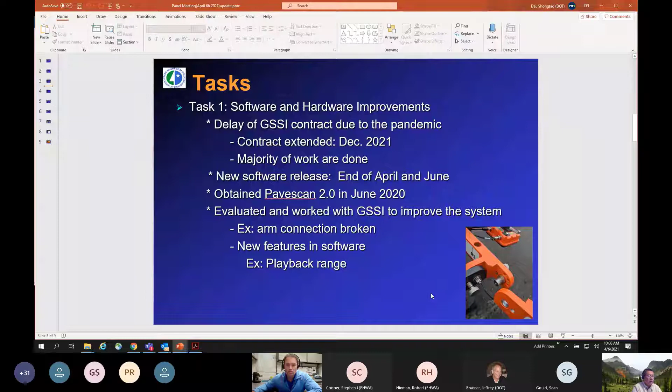You can compare this density on the side. And also you can select the part of pavements, and then you can select from this station to that station to view the data collected. It's a very handy feature for the field people.

And task 2, that's the development of actual specifications. Like I mentioned before, we drafted the puck calibration and the field data collection procedure last spring, and also produced the training videos, and that was based on a 1.0 device. And since we got 2.0, we updated the video portion and the laboratory calibration portion a few weeks ago. And the video is uploaded to the DPS website, and this is the address. So you can go there to view this calibration video, the puck calibration video.

We also plan to update the field data collection video and update these procedures using the 2.0 device by the end of May. By that time, we should be able to get on the field and collect the data. From a data collection perspective, we continue to hire the contractor to collect data for us.

For this year, we are going to try a new program called pay for the data versus pay for the hour. Previously, we just paid the contractor by the time spent collecting data for us. But starting this year, we're going to tell the contractor to get equipment by yourself, and we'll pay for the amount of data. We'll give you a spec and the data format spec, and you need to follow this spec to collect the data for us. Then we'll pay for the amount of data you give us, instead of paying for the hours you spend collecting data.

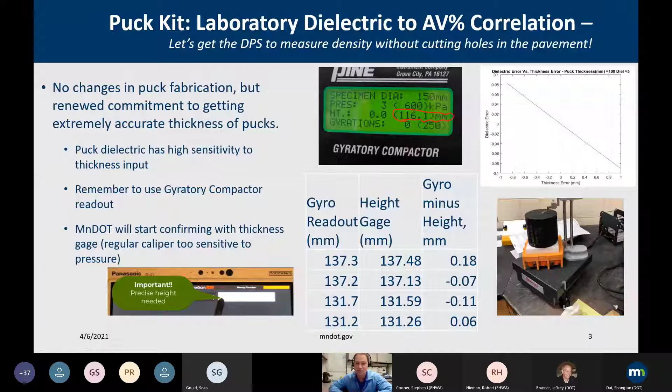And then in the lower right corner, you can see a puck thickness measuring device, and we're going to do some in-house testing with that just to make sure that this gyratory readout is a good way to go. And then also it's good to have a way of checking to make sure that the gyratory compactors are calibrated, which I believe in most states they're required to be. So more to come on that.

And the goal here is to match your QA/QC tracking information that you do for all your material on a project. And the nice part about these inputs is you just fill it in once, and unless it changes, you just leave it there, and then it's tied to your information. And you can choose to track it within the PaveScan software or leave it blank and track it elsewhere. But I think you'll find just keeping everything self-contained in the puck kit software is going to be the way to go.

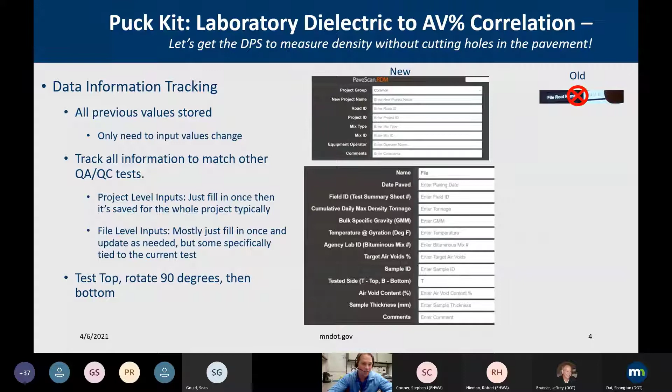And one thing I'll mention, if you don't get everything I'm saying during this presentation, we do have a video I'll be referencing later that takes us through the whole process of getting these tests done with the puck testing kit. Another thing I'll mention right now is we're advocating doing a top, rotate 90 degrees, and bottom test with the puck, just to make sure that there's no effects of where you are on the puck in case there's some sort of a compaction gradient within the sample itself. But again, that's in the video, so keep your eye out for that.

And then also one thing we found with this new puck testing kit, for those of you who did the first 1.0 version, you kind of had to be a ninja a little bit with the samples and make sure you got everything flipped and switched and changed within a certain 5-second time window. And that, of course, leaves a lot of room for error. And with this new puck testing kit, it's very simple. You know exactly which step you're on. You start with the background pictured on the lower left, work to the metal plate, then you do the surface measurement, and then the surface plus metal.

And the contractor who used this was very complimentary of how the software worked and how intuitive it was. So that was good news to hear back from the contractor. Another thing that's really nice, circled or squared here in green, is that you actually get a dielectric readout right away. So with the HDPE, you'll know whether you're within the 2.32 to 2.38 range right away and whether or not your sensor is in spec.

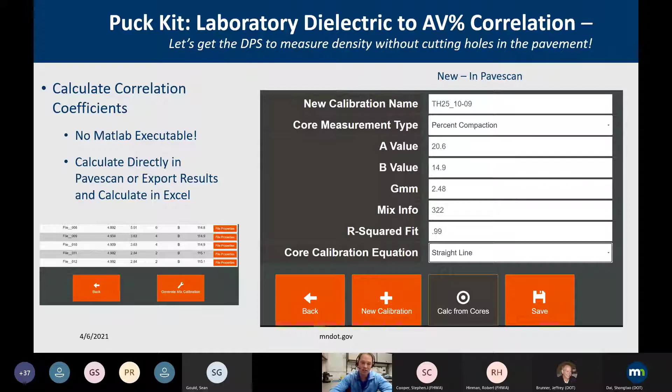And again, no more executables on the processing. You have the results already to go. And in this case, once you go into your specific test, you just take the calibration results for a linear correlation between dielectric and air voids, and you should be ready to go with your field testing kit to be measuring, directly outputting your voids percentage or percent compaction, whatever you prefer.

And this can either be done directly in the software to get the correlation coefficients, or we will provide a little template we've built in Excel, where basically if it's green, that means you can paste data. So in this lower corner is your puck results. And then later you'll see when you paste the field results, it tells you how good your fit is matching to the actual field cores that we're currently advocating that you take to ensure the accuracy of your conversion.

And again, it's just a simple copy and paste from the exported file that of course contains all the information you input for that specific project, which we think is a good way to make sure we're tracking everything right.

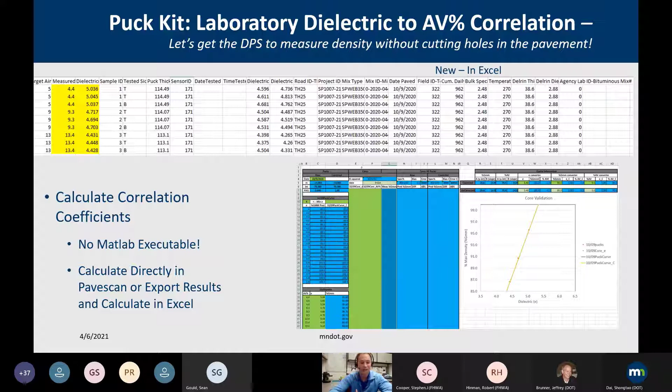But in this case, you guys don't all get a car, I'm sorry, but you do get a puck testing kit if you're part of the pooled fund. And the only thing the vendor asked is that you share all the data that you collect. So from our information, we believe all these different states, Maine, North Dakota, Ohio, Alaska, Idaho, New York, and of course, Minnesota, have our puck kits.

But if you are part of the pooled fund and you have a system, please inquire with us or directly with GSSI, because they did let us know that they're willing to share the puck testing kits with the pooled fund to try to get this technology moving and do this coreless calibration with the technology.

And lastly, I wanted to summarize some thoughts and then also play a little bit of the training video, and this is where you can go for the more detailed information. And please give us feedback, because we have Camtasia software that allows us to do different editing with our training video, but you can jump to different spots. If you're more interested in the test itself, you can do that.

And just in general with this puck testing kit, we think it's a lot more user-friendly. One way to say it is there's less opportunity to screw it up. And then, of course, you get real-time feedback, which is important.

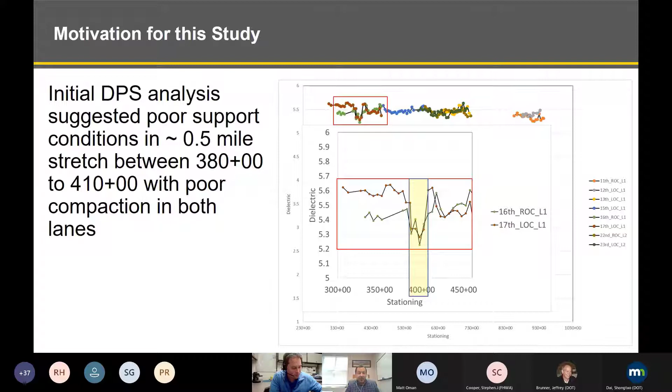Otherwise, with the conventional quality control, quality assurance process, that wouldn't be the case. So that's something to keep in mind - having even just one profile of density could have been enough for this project. I wanted to emphasize that advantage doesn't require full coverage. It just has to show us that the density changes with distance, and that's something we want to take advantage of using this type of technology.

This was also corroborated later on by checking all the different density results. As I said before, the standard QA practice did not capture this low density spot, and that's something we can take advantage of at this point. We can take action immediately and come up with solutions right away, instead of waiting a couple of days, if you're lucky to find that there was a defective area.

With regards to what we're planning to do with this project, the objective is to further advance and improve DPS technology, taking advantage of AASHTO specifications developments. NCAT has extensive experience with equipment and operator certifications, specifically the profile certification that we currently have at our test track facility.

The idea is also to use DPS technology for data collection and analysis of different methods. We also want to conduct round-robin testing and develop precision and bias statements for those results. We plan to support communication by participating in meetings and workshops programmed in the near future, and help with training and technical assistance to states and others, continuing to promote this type of technology and marketing.

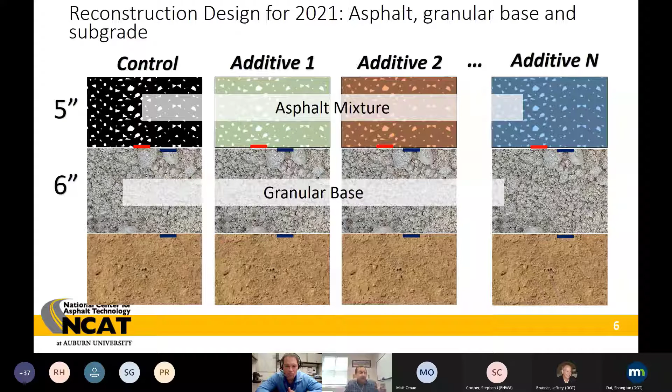By the way, these are going to be placed in one lift, so we're going to have 5 inches all the way down to 1 inch at the track. This way we'll be able to separate thin and thick layers at the track as well.

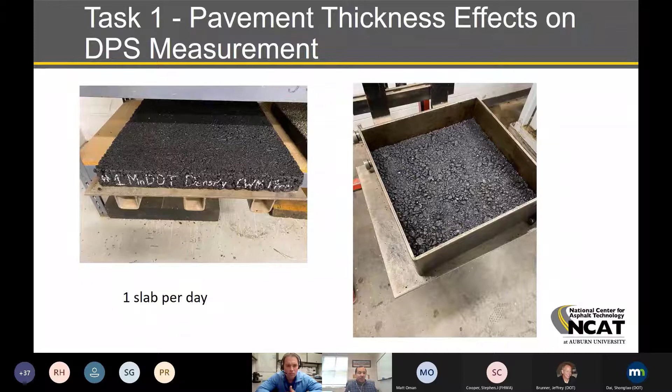We already started the process of building these slabs. We can do 1 slab per day, and the process at the beginning is going to take a few slabs. We're going to test extreme values in regards to thickness and density.

As you can see here, the lab testing plan was to have 2 different mixes - one is a 9.5 millimeter nominal maximum size, and the other is a 19 millimeter nominal maximum size. The plan at the beginning was to have 4 different density levels ranging from 88 to 97% of Gmm, but at this point we're going to try to start with extreme values from 88% to 97%. We're going to have those 2 mixes with slabs ranging from 1 inch to 3 inches for the 9.5 millimeter, and a minimum of 2 inches to 4 inches for the 19 millimeter.

That's basically trying to comply with the thickness to nominal maximum size ratio - we don't want to go too low, which makes it difficult to compact, or too high, which may cause different effects. So that's pretty much task 1.

Task 2 has to deal with equipment and operator certification, and here we're going to try to reproduce what we have in place with regards to profiling systems. The idea is to come up with a parallel practice to AASHTO R 56-14.

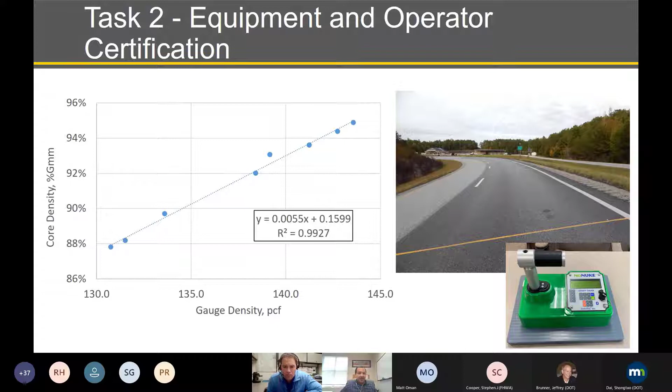The cores were taken at the beginning of construction, and then there's another set to have 8 total. The second set was taken 1 year after, and this is the correlation between the core density and the gauge density. The idea is to use this correlation to have the entire density profile using this device, and that's going to serve as a baseline to conduct the cross-correlation analysis.

With regards to task 3, we're going to work on development of precision and bias statements for the pucks that are created in the lab. As Kyle mentioned, we're hopefully going to use that new kit to evaluate or come up with the relationship between specific gravity and dielectric using the advantage of that new kit.

The plan is to have one set of cores or pucks. We're going to create those here at NCAT, and then ship those out to different labs, so every lab is going to have the same set of pucks to test on. We're going to use ASTM E691, which is the standard practice for conducting this type of study and determining precision and bias statements. From here, we're going to develop repeatability and reproducibility results or criteria.

At this point we are looking for a minimum of 6 labs. Ideally we'll have 9 to have the entire matrix to come up with these values. One thing we discussed with Kyle and Dr. Dai is to maybe use one antenna as one lab, and that's something we can do, but we'll still need to find a couple more labs at least to have more data.

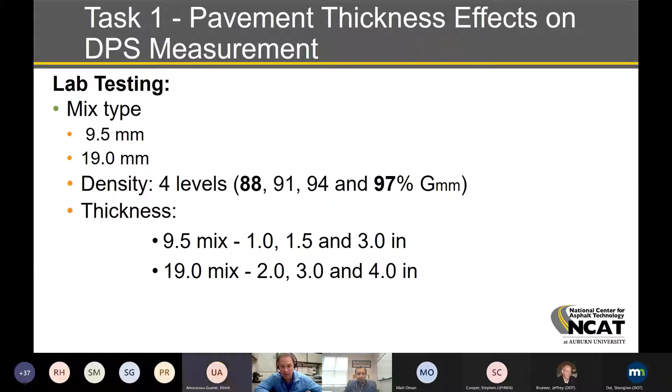All right, so continuing with task 3. Again, the plan is to use those same two mix types, a 9.5 and 19 millimeter, and also use the same density levels ranging from 88 to 97%. One question I wanted to ask the participants is whether we may want to use CoreLok from the beginning.

As Kyle was mentioning before, we plan to measure the dielectric before dunking those samples in water. But if we were to use CoreLok, we may be able to avoid adding water to the pucks. So that's something we're probably going to do, use CoreLok for the samples we distribute among all the different labs. Of course, we want to know the specific gravity of those pucks, but at the same time, we don't want to add water to them. So I think at this point, CoreLok is the way to go.

And later on, we're gonna move on to field testing, and we're gonna come back again with several sections where we're gonna take cores, and we're gonna compare what is the effect of moving from lab compacted samples to cores, and we already have an idea based on several conversations and meetings with MnDOT that there's an effect. We would like to see what is going to be the effect on those statements when we move from lab compacted samples to cores.

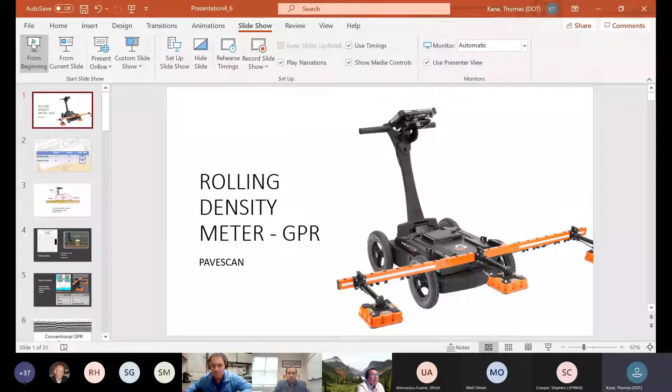So 2020 was the first year that we piloted the rolling density meter. We did it a little differently than I think some of the other states on the call. We don't actually own a meter yet. It's coming. The GPR is in the mail, if you will. We actually put the language in the contract for some paving work we had in 2020, 5 projects specifically, and we had one of our really proactive, forward-thinking testing firms, Advanced Testing, actually purchase a unit and do the testing.

It was really good for us because I don't necessarily know if we had the manpower and the availability last year to do all of this ourselves. So we had a really good partner with Advanced. So a lot of this data that I'm going to go through came from them, but obviously we were working with them quite a bit through the season. We had 5 jobs scheduled last season. Only 3 went. You know, we ran out of calendar a little bit.

But this presentation that I'm going to go through with everybody right now is what I shared with both some of our regional construction people who have asked for it and our regional materials engineers. So some of these slides are going to be very much not news to anybody on this meeting, but I left them in because I think it was important to understand how we're promoting it or explaining it within our regions of the state.

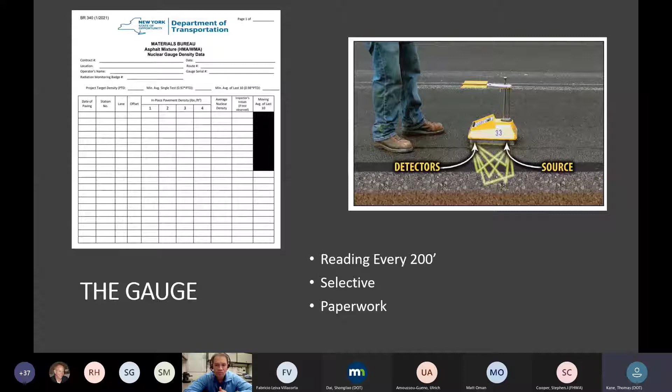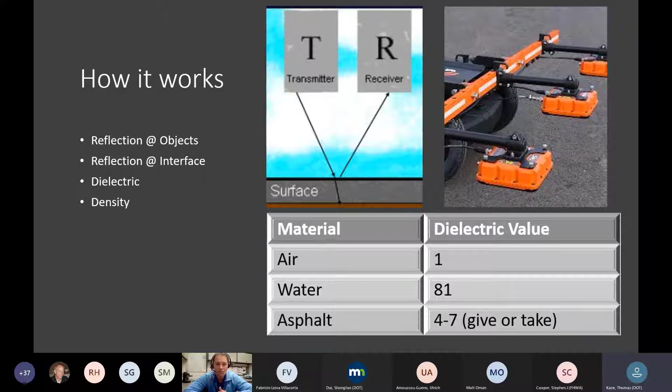Kind of jumping ahead to how we put it into contracts this year, like I said, we ended up doing 3 last year. This got inserted into two different contracting mechanisms, but our process was still the same. We still asked for the gyratory specimens compacted at anywhere from 86 to 98. I don't think we necessarily needed to be doing that, but for the first year to get this in a contract and get some exposure to it, we figured why not ask for a little bit more.

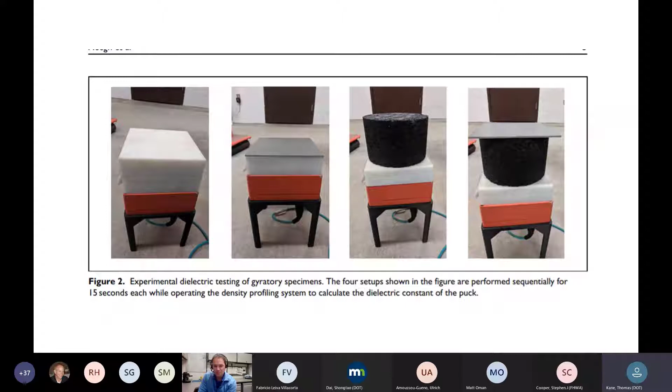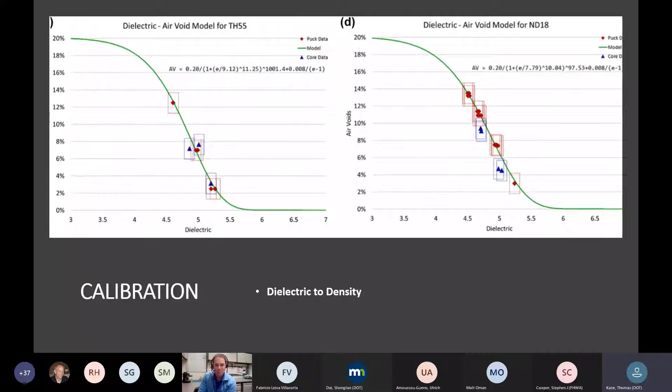Going through with the puck kit, obviously the first time, but this slide, when I presented it to our regional staff, was to basically promote that there is a measurement going on, that those colors that you see on the screen are being derived from something. They don't typically see this, but it's important, I think, for them to know that there is a tie-in. And this is just another slide to demonstrate that the gyratory specimens that we're asking for really are fitting into that linear range of expectations.

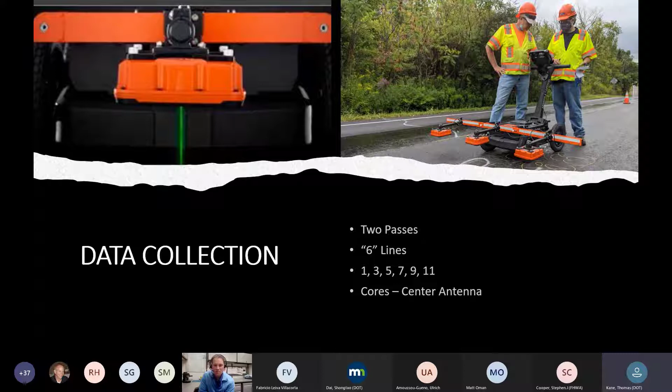When we did our data collection, just a couple of things. Obviously, we did all of our cores with the center sensor. However, we did 2 passes at 1, 3, 5, 7, 9, and 11, plus or minus, down the core. So we're getting 6 lines of data. And we'll talk about that a little bit more in a second. But here's the beginning of what the data was. The core is always going to be shown in pink, and we'll show that on the graphs as well. And then the blue will be the radar information, the orange, the nuke gauge.

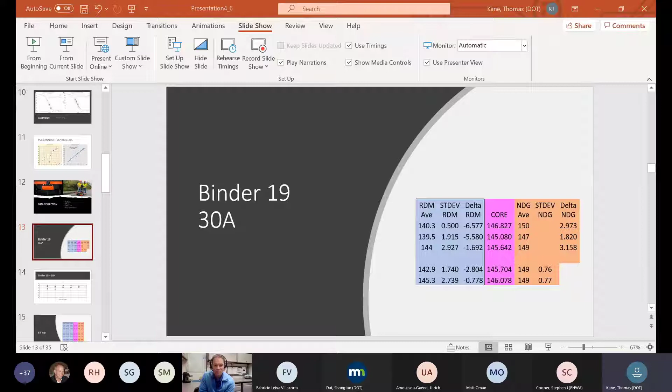I still have everybody? Yep. Sorry about that. Yeah, we're here. Yep.

On this first project, we also had some binder data. The binder data, as you can see here under this delta RDM, we were a little bit all over the place on that first day of data. I think some of our data may have been skewed by minor production changes at the plant.

The plant, this specification that we ran on these contracts ran in the background. So meaning this was just a shadow program to collect data. Their pay and their incentive payments are still based on volumetrics. So there still was an incentive, even though we asked them to not move the targets. Obviously, there's a financial incentive for them to ensure that they are going to get the most incentive payment they can. So there were slight movements. I don't know if that played a role here, but it is a possibility.

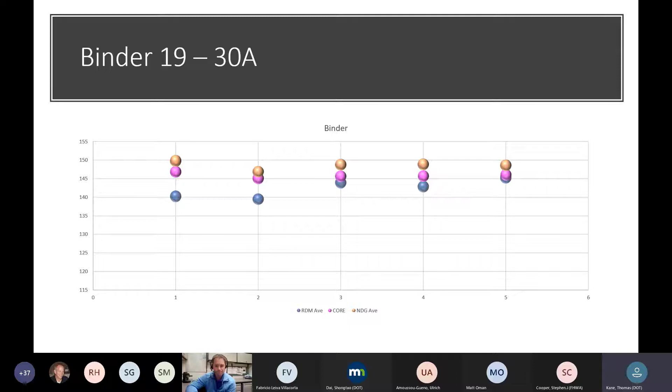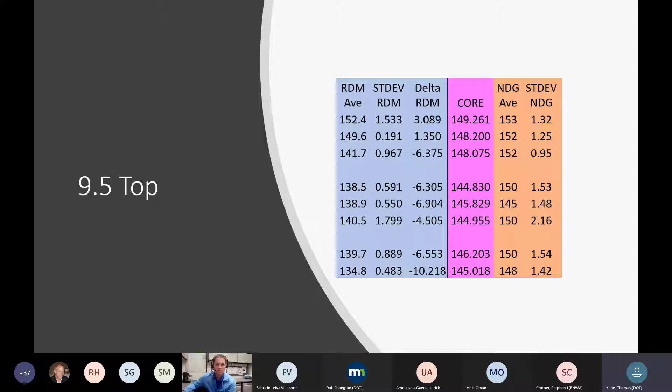Graphically, you can kind of see this a little differently. Pretty tight though. Our binder data actually looked reasonable, I'll say, particularly for our first day, our first project. The 9.5 data, I think there were even more production changes on this one. As you can see, that column of delta RDM right here really was quite high. We're getting at one point 135 for an average on the RDM, 145 on our cores. So this is significant.

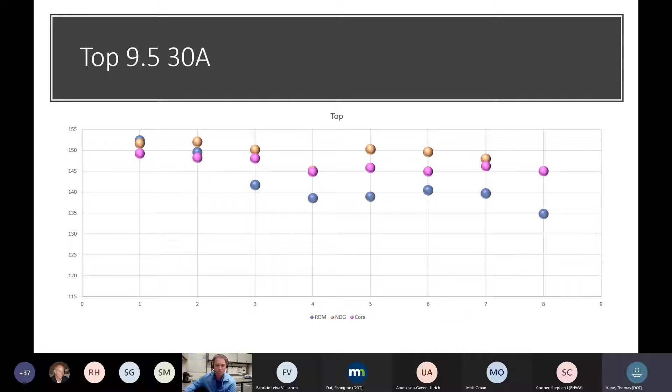It does seem to trend, as you can see with the data a little bit. The RDM data seems to be consistently lower. The nuke gauge and the cores obviously are a little bit closer, but whatever the reason was here, it was pretty consistent. The longitudinal cores were really the interesting one on this first project. I highlighted the ones in red where we see the delta RDM, and I apologize. It's a lot of data. I don't expect everybody to really be able to take it all in.

But we had some really, really poor values on these. The standard deviation was kind of all over the place early on. Seemed to kind of come down as you get down to the bottom of the page here. It seems like we've kind of got them together. It was a little bit tighter. Our deltas were looking pretty good, but then we would occasionally still get these flyers.

It's important to note too that we also had some big deltas with the nuke gauge on the longitudinal joint as well. I think as we move to this season's work, the longitudinal cores is something that we're going to look a lot more at. This was the only project where we had longitudinal cores in a longitudinal measurement for, but there's a lot here to unpack. Tom, question. Yes, Tom, sure.

So did you core the longitudinal joint? Did you core through the joint, or did you take a little bit away from the joint? It's a little bit away. A little bit away. So we're primarily using wedge joints, so we're trying to get the meaty part of that wedge. Okay, similar to ours. Yep. Okay.

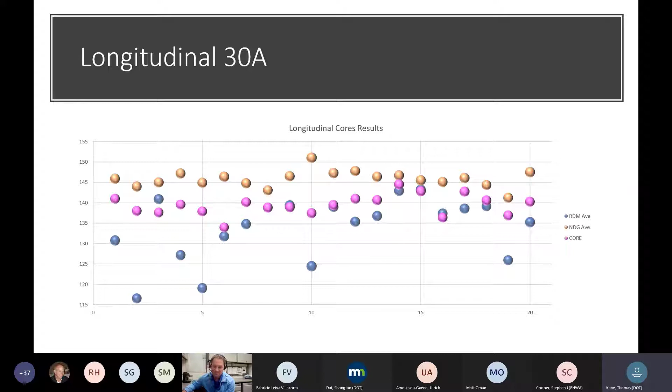So just more scatter. I think when you plot it, things kind of pop up, but you definitely see that we're a little more variable, definitely early on. But the one thing I want to keep coming back to is that this was our first shot. This was our first project out of the gate. I'd like to think of it, I mean, I had 2 little kids. Christmas morning, there's nobody stopping to read instructions. Everybody just wants to go out and take it for a spin. And we definitely learned some things the hard way. So I think you'll see our data accuracy and our delivery a little bit better as we go on here.

The next project, we got considerably better numbers on. This one was a small vendor placed job out in the Buffalo area. If you look here at the averages, and I should say the differences, pretty close. 2 pounds off, 3 pounds off, 1 pound off, 2 pounds off, really getting good numbers. And really, I thought what was interesting here is how close the standard deviation was.

When I'm talking about standard deviation, we're really taking a look at these 4 values of the rolling longitudinal, rolling transverse, static transverse, and static longitudinal, and kind of comparing them. All really, really tight. We didn't necessarily see this as much in the Utica job, but this was pretty telling to me.

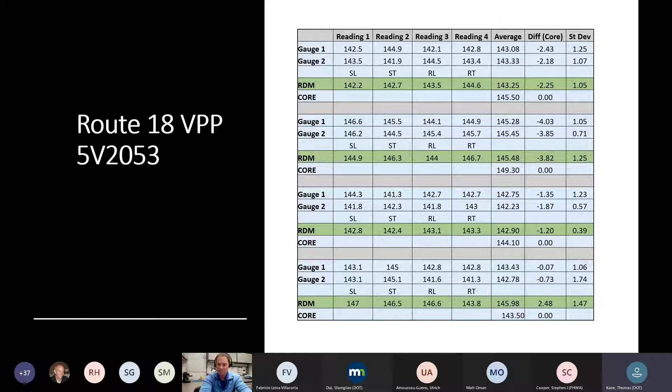Another graphical look at where that data is. I find it funny on day 2 that the core was much higher than both the RDM and the gauge. So I don't have an answer for that. I think it's just one of those things. Maybe that core was a little wetter when we measured it. Not quite sure.

Kyle Thomas, we got a couple questions in the chat. Sure. Do you want to read them? Sure. How often did you do a puck test calibration of the RDM during the projects? So we did the puck calibration early on, and then depending on if we had some changes or if we had some time on rain days, we would do another one during.

And then the next question, are there any time constraints between collecting field samples and fabricating pucks in the lab, i.e. within 24 hours, 1 week, etc.? So that was part of the reason that we had it in the note. We asked to get this mix prior. And this is something that we're going to set up for our producers and our contractors again this year, because we put the note in the contract that they have to make these pucks ahead of time. These are typically commonly used mixes that they have off the shelf.

So if they know that they're going to be working on a GPR project at the end of June and they're running mix early June, we'll work together. We'll have them make the mix ahead of time. We'll take those samples. We'll transport them back to Advanced Testing. Or in our case, as we get our system in shortly, we can test them as well and get those numbers. So we try to get that early on because I think that's going to go a lot with educating the contractor, and they're going to get meaningful feedback from the unit from day one. They don't have to worry about it after the fact. That's it for now. Great.

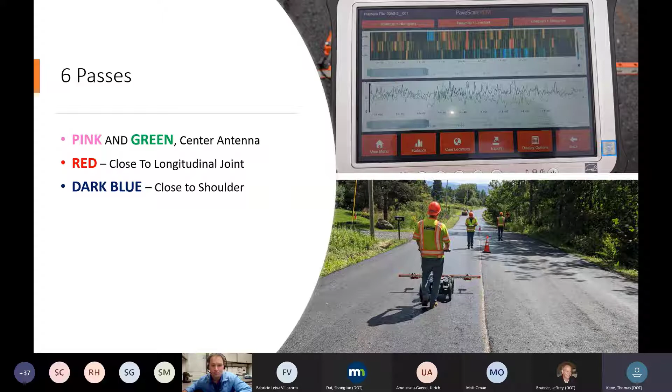Going back to that picture of Christmas morning when everybody's ripping things open and nobody's reading the instructions, we didn't do a swerve test. We didn't necessarily see this bias right away. We saw similar, probably worse results in the Utica project, our first one out. We didn't really know what was causing it. It was that arm issue, already referred to in one of the earlier presentations. The slight variation of where those arms were sitting on the unit was causing a bias in the data.

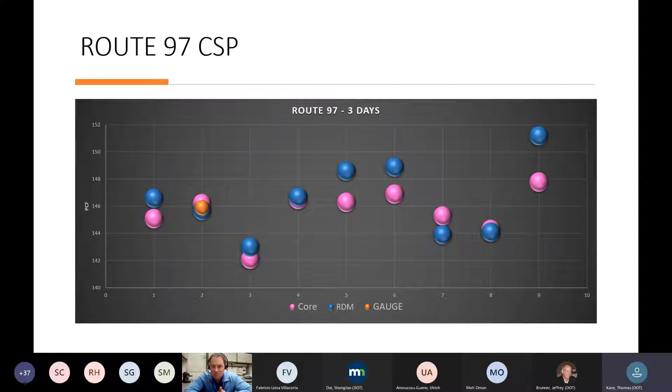The only downside was generating this data in a format that you could read. Advanced Testing would produce a lot of work for us and send us a lot of files, but it was still a lot of manual manipulation of the data to really see where we fell. Our core data from our normal QA testing, getting that back from a second or third source, matching it back up to the Advanced Testing data, is what took some time, and you couldn't be distracted. So my point is we didn't really know we were doing this well out on 97 until after the fact.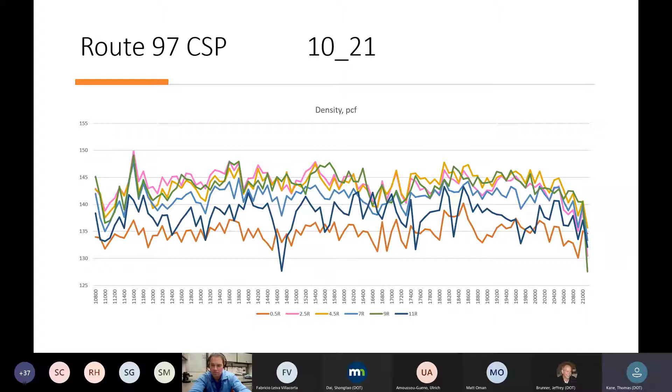So this is data that we could get back right away to the contractor. They'd be able to get that feedback right away. I don't know if that conversation went on because I wasn't there during construction on this one, but still, we can go back. We can see what we kind of already intuitively know, that our lowest density spots are going to be out there at that longitudinal joint and at the shoulder's edge.

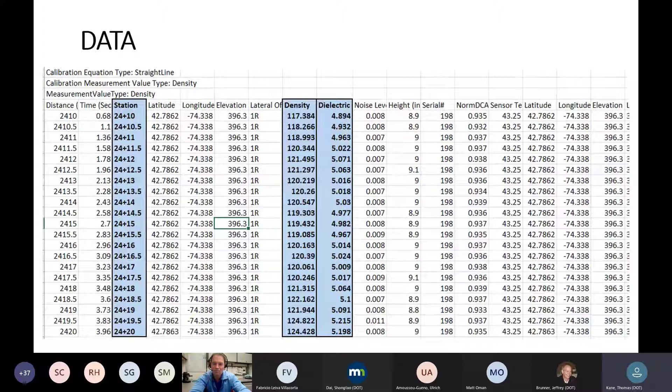I bring this back up, the data output, because this is something that we talk about with our EICs quite regularly. What the hell do I do with all this? What does all this mean? This is the data that we get from Advanced. Now we have to make our decisions on how we roll it up and what we're going to do with it. We're getting tons and tons of data. People want to know, what does it mean? Take some time to do that manual outputting.

Just so you know, that offset was also from the issue with the arms, the bias on the outside from the cart. Something else to look for, something else where it was caught. But I do think that as an agency, we're going to have a spec that's going to look at some sort of statistical output or statistical analysis from all that data.

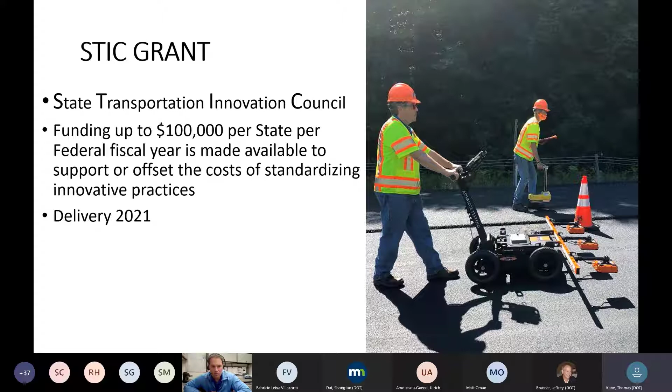So what I tell the guys is we're getting a ton of it. I'm not quite sure where our accuracy is yet. We have some really accurate data that we feel really comfortable with. And then we have some more that we just had some flyers on, and I really don't have a good explanation for it. So I said that Advanced did our testing for us last year. They bought the cart. They see some promise with the technology. We're also buying ours right now with the STIC grant. The bid's getting opened shortly.

And this isn't a plug just because the MnDOT guys are on here today. This YouTube channel for the guys first going out, really good. Walks you through everything. It's going to save us as an agency a lot of time because we don't have to make these training materials, and quite honestly, they won't be to this quality.

2021, I have a list of projects. It will be on the last slide, but we're really trying to identify what our accuracy issue is. Try to identify the limitations. We talked about heavy trafficked areas and the contractors turning around to pave back, match up in a lane, and we still got a guy pushing his cart twice up and down the roadway with traffic backing up. Little things like that.

The last bullet on that side of the slide is the promotion, which has been pretty successful because I think a lot of people are interested, but we have to keep going with it. We have to show the technology off, not only to our producers, but our contractors and our regional people. Everybody's interested, but they still have to see it. They kind of have to feel it. They have to find something in the data to kind of justify it.

So we're really trying to make an effort to make sure that we get projects throughout the region to get people familiar with it and get the contractors to believe that the data that's going to come out of this thing is going to be useful.

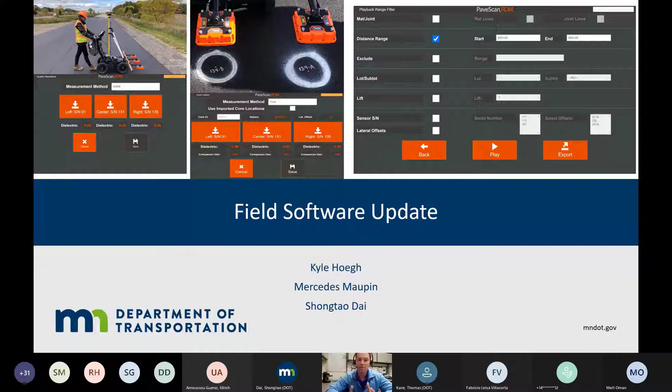All three are big, but the one I'm most excited about is the on-site playback range filter. This addresses being able to take all this data that's collected and make it easy to tell the contractor, or whoever's asking—maybe the project inspector—how's the compaction looking today? That's what this playback range filter is designed to address.

So let's start with what we're calling the quality assurance module in the software. Like I said, it's mostly designed to make sure your sensors are working correctly, so you don't run into situations where you've collected a lot of data and have a validation problem caused by the sensor bias itself. Basically, the raw data you're collecting needs to be of the highest quality, and that's what this module is designed to test.

When you use this new module, you just select quality assurance to let the software know it's categorized as quality assurance check data. One feature is that you can still include it with your field analysis, but instead of wading through all the data to determine what's your quality assurance data, it's placed in a specific category. We'll see that in more detail later.

The three types of quality assurance checks the software currently allows are: high density polyethylene, which I don't currently recommend—it's a good gross estimate of whether your sensors are working properly, but it doesn't represent asphalt pavement. So at least at the beginning and end of each data collection, and more often, you'll want to do either a repeat line test, running all three sensors over the same line, or a swerve data collection, collecting a significant portion of the population so you should have similar results across the three sensors.

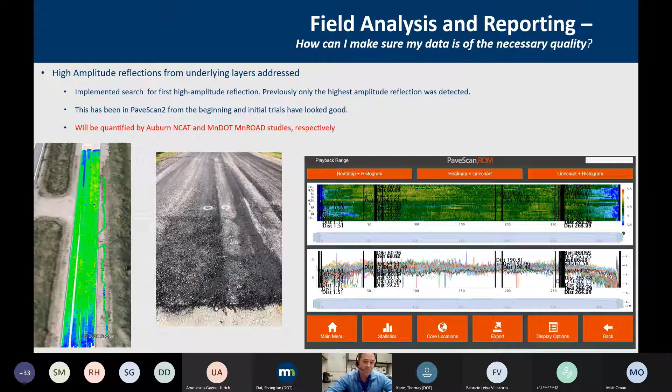So with the height of the antenna relative to the surface, you get an indication here, and this is really important for debugging purposes. So if you do start to get an issue with your sensor, you have this height of the antenna that's exported, and again, this is something that was very useful when Minnesota, Ohio, and New York had the issue with the sagging arms.

In general, I think this is a good time to mention that a lot of these improvements, especially with testing the quality of the dielectric, are designed to give you as real-time as possible a result and as much confidence as possible to say this system is not working the way it's supposed to, because trust me, the vendors would prefer you to tell them that their system is not working properly sooner rather than later.

So please, when you go out there with the system, even if you missed something that was obvious, that's the best kind of fix to do. But if something's off with your system, please give us a call or give the vendor a call and try to debug to get your system back up and running the way it's supposed to.

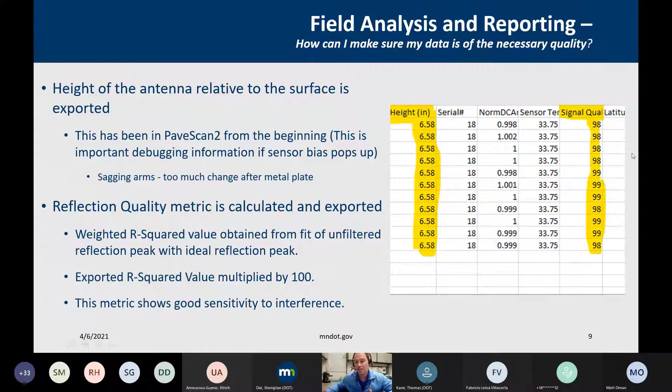The reflection quality metric is actually something new that's supposed to help us if there's some ambient noise, such as at a cell tower. This is outputted as a signal quality that's typically close to 100. But as you see here, if you go close to a cell tower, that signal quality measure starts to drop. This might be something we want to monitor to make sure we're identifying locations where we have too much ambient noise to get an accurate dielectric measurement. That's currently implemented in the new version of the software.

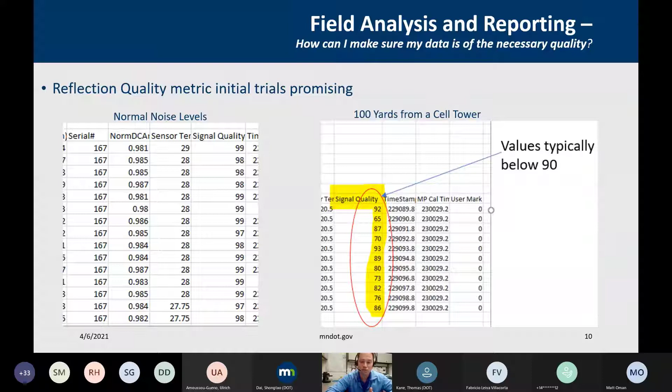The next general direction where there is an improvement with the software is with the validation core locations. What we're trying to accomplish with our cores is to make sure that the correlation we develop between our dielectric measurement from the DPS in the lab and what we use to convert that to actual air voids is good. That's why it's important to get a very accurate dielectric measurement, and also make sure you're cataloging correctly the exact location of the core, and most importantly, getting quality data at that core.

This, what I'm calling a hybrid mode, is what we're currently recommending, where you have basically the best of both worlds. Before, we had been doing static measurements directly over the core, or distance-controlled measurements leading up to and past the core. Ohio, Alaska, Minnesota, and maybe some other states saw better results for whatever reason with the distance mode. But the issue with that is that you're taking measurements off of the core location.

So with this hybrid mode, you start basically at the diameter, one end of the core, and then it's still distance controlled, but at a much higher frequency. So when you collect across that 6-inch diameter core, you're getting multiple measurements to make sure you get a really highly accurate dielectric at that core location. The other nice part about this software is that you get that readout again right away based on which sensor you're actually using at the core.

So I'll actually be presenting the next topic too, and I'd like to give us time to have discussion on some of the more big picture things. So I think I'll jump right into the example project here, to keep us on time and allow us enough time to really have good discussion with each other.

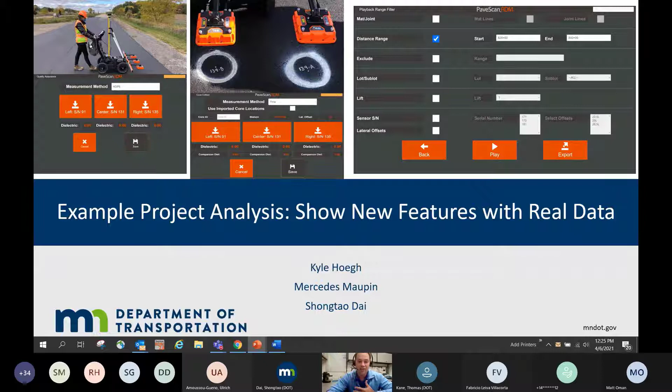So basically, the purpose here is to take these new features and show you guys what it actually does for you with real data. So we're going to start with the module that again is called the quality assurance check, but really what it's doing is trying to make sure your sensors are working properly. And I'm going to look at it from the lens of a single day, August 18th, that we collected on Highway 30 in Minnesota. And I'm going to use that data to explain what each of these features are doing for us.

And then I'll take some data from other states that they've sent me, as well as some other projects that we've done at MnDOT to explain some of the more extreme cases of why we do these different things with our on-site software. So what you see here is the real-time dielectrics, and what's nice about this is you can see right away that they're all within a reasonable limit of each other.

We're hoping that they're all within 0.08 of the global median, and you can feel warm and fuzzy about your system and your data collection when you see something like this with your first swerve test or line test of the day. And this is also exported in terms of difference from the global median on an on-site measurements tab that you can get to. And this will all be part of our videos that we create for all these updates that we're planning on releasing in May.

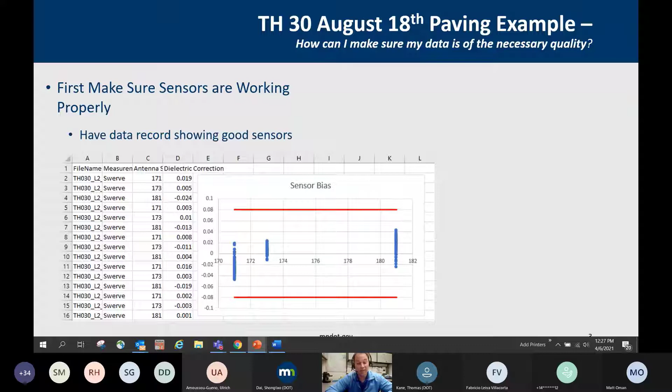So the other thing you can do with this export is once you're done with your data quality tests for the day, you can easily export it and just show where they are relative to your acceptable line. And this is the results from this Highway 30 August 18th paving example, where you can see, okay, maybe there was a little bit of bias with sensor 181 where it was a little high, and a little bit of bias with sensor 171. But at those magnitudes, you're really happy with that no matter which sensor is on that spot on the pavement, it's giving you a good, accurate result. And this is a good way of cataloging the quality of your sensors as well.

But as we said, I'm also going to give some examples of why we have these different on-site responses. So as Thomas mentioned in his presentation, on their initial project, while they were still kicking the tires and excited to get out there, they were seeing a bias with one of their sensors. And they didn't end up doing the quality assurance test, but I took one of their locations where the left and right sensor were both 2 feet on each side of the longitudinal joint, but still had a 0.3 different dielectric. So it wasn't a swerve test, and maybe the right sensor actually was 0.3 lower than the left based on the mat itself, but probably not.

And I use this as an example to say, okay, Thomas would have went out there, or whoever was collecting the data, and they would have got a pop-up that says data quality is out of range, would have saved some of the trouble with going through with the validations with the cores and the nuke gauge and finding it out that way. This is something where you can get that feedback as soon as you perform this sensor validation testing. And the other thing, as I mentioned earlier, is it gives you the confidence to call the vendor and report it. And maybe it's something simple. Maybe you just have to recalibrate with the metal plate, but it really can save you a big headache.

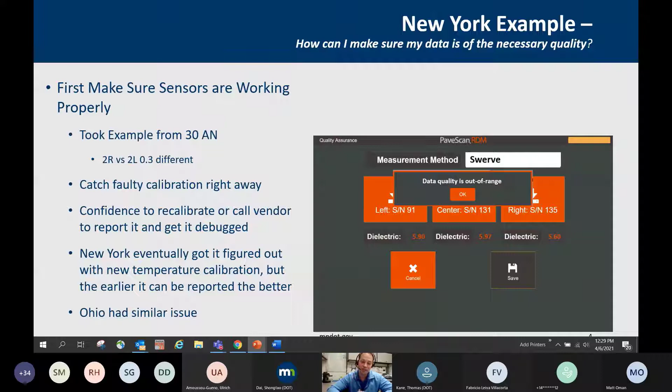And that's another thing I'll mention, I think I alluded to it a little bit earlier, but the vendor does want to know, and really all the vendors want to know when their systems aren't doing what they're supposed to do. So please don't hesitate. You don't have to assume that you did something wrong. It could be the equipment itself, and the ability to fix it really depends on how early you can report and try to debug what the issue is. And that's something that I would just encourage all the states to do.

Minnesota, when we first took out the new 2.0 system, I was, like I said, ready to throw it in the trash. The data quality was not great, and we reported it to the vendor, and it turned out we had been given the wrong temperature calibration. And in this case, getting that information to the vendor right away allowed us to collect the entire season from there on out with very high quality data. But again, the goal is to have everybody be able to have that sort of feedback and a pop-up telling you, okay, your data quality is out of range, you need to do something different or report it to the vendor.

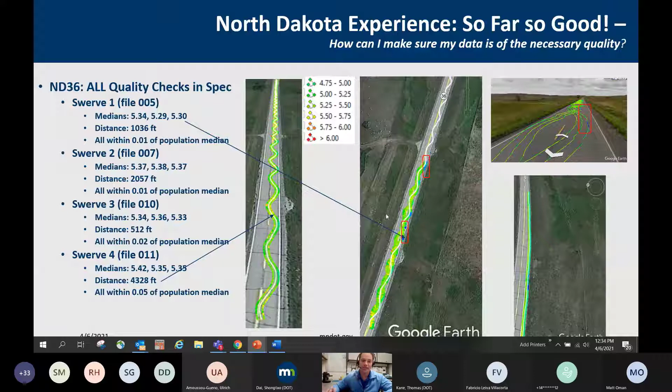We also looked at North Dakota's Route 36 data, and again saw really good results showing the quality of their sensors on that project, including a really long swerve. And then I also wanted to show an example where, because they did the down and back swerve where they had different sensors on the different side of the pavement, even though it looks like on the right side of the pavement they had some lower spots there, the swerve still was able to detect that the sensors were working properly. And then when you actually map along that edge where it was low, you see the low density. And again, these sort of trends are only possible to see when your sensors are unbiased, and that's what we're doing with this quality assurance check.

So the new software, well, this has been implemented for a while now, allows you to do, we're recommending a linear fit, whether it's percent compaction or percent voids, or even nuke gauge density, to use this sort of fit based on these coefficients to relate your dielectric to air voids. And you can catalog these based on the day and route, or however you want to remember the different days of paving, and these can be called back as you process the data, and we'll see that a little bit later.

Kyle, there is a question in the chat box. Does the temperature affect the sensor calibration? Okay, this is a great question. So when we're talking about temperature calibration files, such as the example where we saw poor data quality coming from our sensors the first time we took RDM2 out,

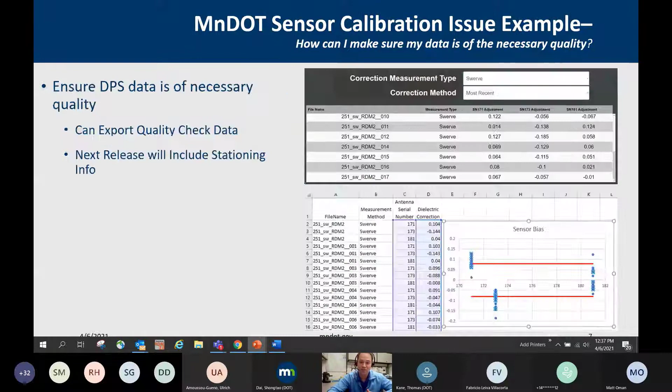the field. So that's a really good question. I hope I answered it for you. Are there any other questions, Di? Not yet, not so far.

Okay. So with our core measurements check, we also have that same real-time table, which is nice because now you have all the information associated. So you input your core ID, the station it's located, the lateral offset, and as soon as you have the percent voids result, you have your validation data point. And this can also be exported, which is important because now it's as simple as a copy and paste back into your

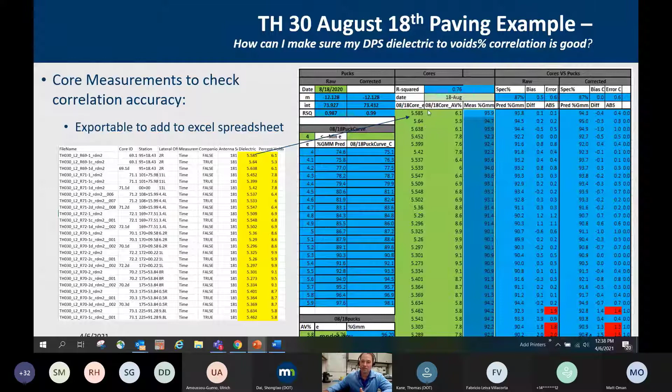Excel file. So if you remember, we had pasted down here in the lower left our puck results to create our correlation. Now we can paste our core results to determine if our correlation is good or not. And in this case, when we're looking at our relationship between the blue line, which is our relationship created based on the pucks, we can compare that to what we're seeing with the cores, which are these gray dots.

And what you see here is that, generally speaking, if you look at the difference from predicted versus actually measured, we're within 1% voids for the majority of these core validation positions until we get down closer to the end, where we have upwards of 2% higher than predicted. This is just color coded so that if it's over 1.2% different, we color code it red, because that gives us an indication that these data points are not accurately reflected by our prediction.

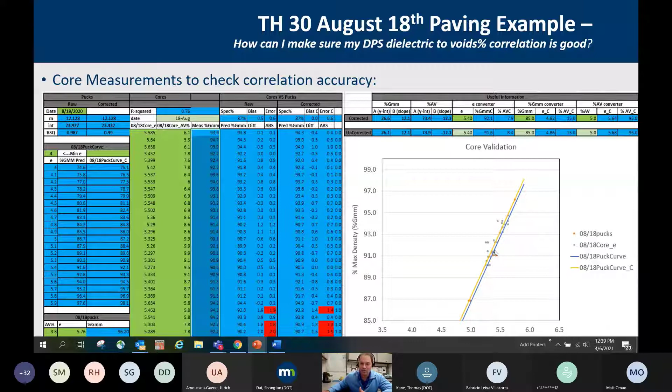So looking at the data here, there actually was a change in mix that didn't trigger the creation of another correlation because it was only a 3% change. So one working theory as to what caused those couple data points to move off the line is that the difference in dielectric properties of this Northwood half-inch rock versus the Glenville half-inch rock is actually what caused the need for the recalibration.

So because of observations like this, what we're planning on doing for this next construction season, especially now that we have our Puck 2.0 kit that we can keep right in the contractor's lab, is just shoot for dielectric of all of the samples that are fabricated throughout the day. And the nice part is they have to fabricate those samples every 1,000 tons anyway in Minnesota, and different states have similar procedures. So we might as well get a dielectric value and monitor it, and instead of trying to guess what type of changes in the mix are going to cause a shift in our curve, we can actually just measure it.

And I suspect if we and other states start measuring this, we'll find that this dielectric check might be a pretty good quality check on the mix itself. That is to say, if there's no reported change in the mix, but you see a spike or a decrease in your dielectric, that could be a good indicator that something with your mix is changing, whether it's a wet aggregate source or whatever it is.

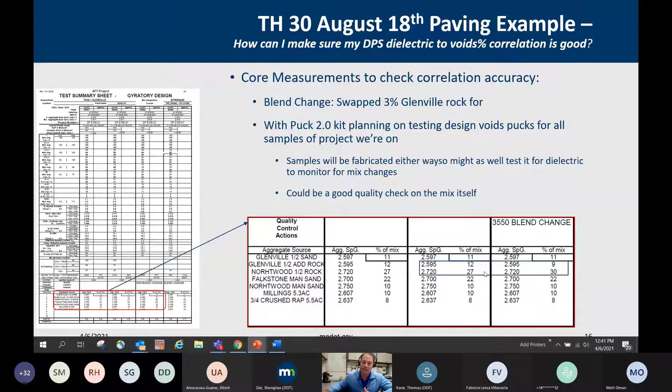So anyway, I gave this example because it speaks to the importance of having a good handle on what exactly causes a change in our relationship between dielectric and air voids. And with this new puck kit, I think we're in a good spot to be able to monitor this, not just day by day like what we've done in this Highway 30 example, but sample by sample.

So this brings us into the more fun part, in my opinion. So what we've done so far is made sure our raw data that we're measuring is of high enough quality, and our correlation from dielectric to voids or percent compaction is of high enough quality. Once you have that, really what you have with this technology is a continuous assessment of the placed relative compaction of your mat, and you have it real time right behind the final roller.

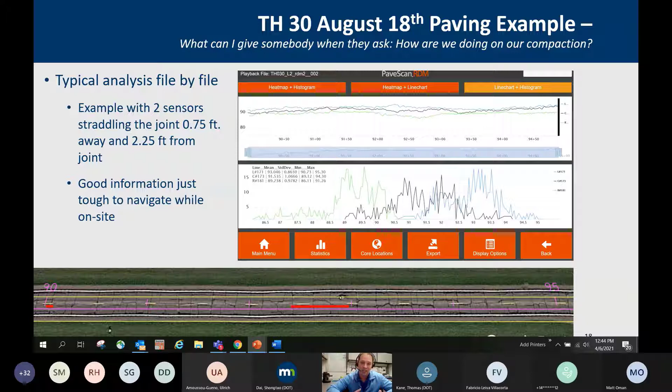I told the software to export it as a red line out to our Google Earth image. And this is still something you can get with your file by file analysis. But any of you who've used this software, it's very hard to just go file by file when somebody asks you, something happened at station 225 plus 30. Can you look up what's the DPS telling me there? It's not really well set up until now to be able to answer that question. And that's where this playback range is really critical and I think a really powerful tool.

So by zooming in on the stationing corresponding to one of the cores, which is at 172 plus 00, we saw 89.47 value corresponding to the DPS measurement, and the core result showing up at 90.1%. So obviously one of the better spots for that section of pavement. And then also at station 175, we got a 91.3 on the other side, which corresponded again to one of the better spots of the pavement.

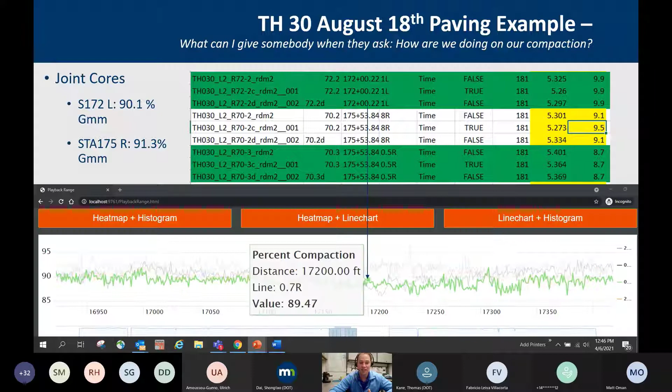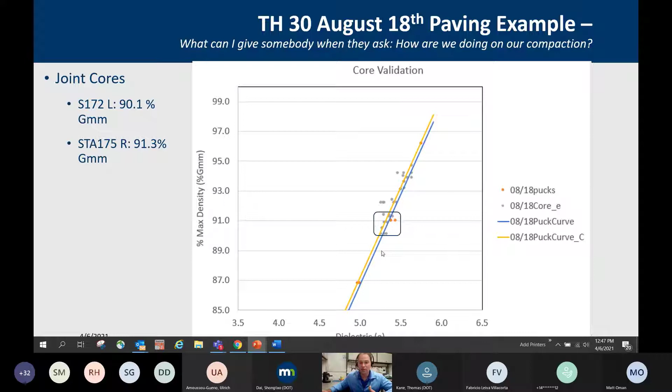So these are the only cores we have for the entire day on that joint. And again, to refresh your memory, there were lots of different locations that were significantly lower on that project, but that's basically what we're stuck with our current coring procedure. So once we see that, then we can go back to our calibration and just remember that we do have dielectrics and percent max density results there, so we can feel pretty confident in our correlation at that point.

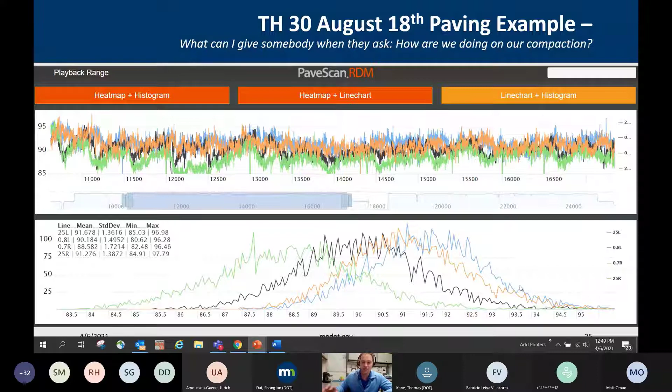And then this is the upper approximate mile of the pavement, again seeing really low density on that right side of the joint. I'm kind of harping on it quite a bit, but this really points to the importance of doing your quality of your dielectric check, because if you have a biased sensor, you could see a distribution like this that's not actually showing you lower density, it's just showing you a biased sensor.

So when we see something like this and we have properly checked sensors and we have properly validated correlations, we can tell a lot about the pavement when we're looking at this data here to see where the deficient spots are.

This is another example showing, if you just output what you see, black is within 8 inches of the joint, and blue is 2.3 feet away from the joint. The reason I exported this to show the group is that you really see what look to be kind of noisy trends when you look at it at a 3 mile width here. But in fact, when you zoom in on these areas, they're legitimate changes in the density being observed by this technology.

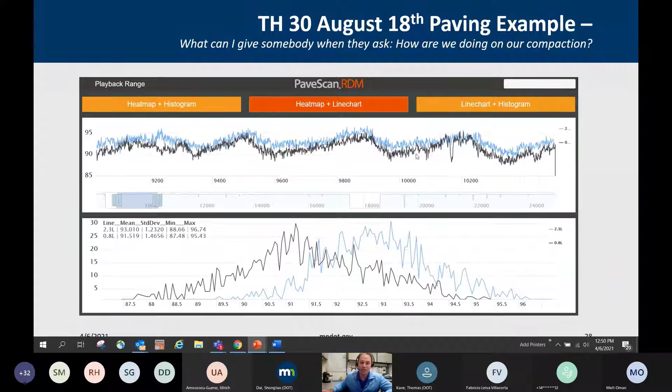So it's a really powerful way to see how your mat is changing in compaction at multiple offsets due to various construction practices and maybe some underlying layer effects.

With this playback range, this defect export becomes really powerful too, because now you can see beyond a reasonable doubt if, for example, a contractor or inspector says, 'Oh, I noticed something around station 210 through 217, can you let me know how I'm doing?' Well, you can export your defects, in this case defined as 88% or less for 10 feet or more, and see a real clear indication of where you're failing with your density. Ideally, you can catch this sort of stuff early enough so that you change your practices so it's not happening anymore for the rest of your project.

This is an example just to expand upon. So now we're switching away from 30 and back to 251. Dr. Leiva gave a good introduction to this, where we had a project where the contractor did great on their density—they were up above 90% on the majority of the project. But for whatever reason, the stationing from 390 through around 400, there was an extreme drop in our density here.

Another interesting feature of this type of technology is you can really see local drops even within this generally deficient area, where some places it's all right where the core happened to be taken, and some places it's a lot worse. This kind of speaks to the importance of not just taking small samples and assuming they're representative of the pavement, and really not even assuming that you have a nice normal distribution.

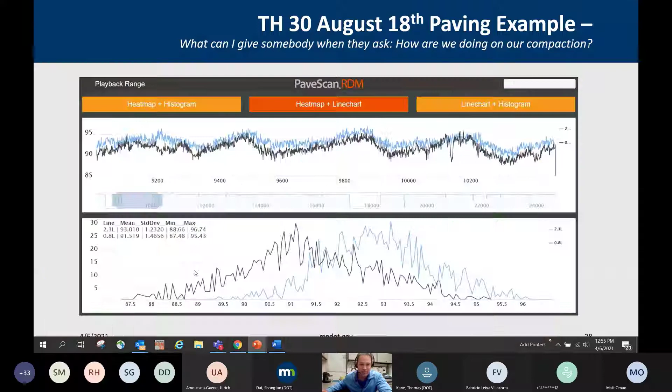Although I will say it's kind of interesting if you look at some of these deficient locations, it's a little bit informative to see some of the - I don't know if I exported one where it was almost like it was rubbleized in 2017. So in some states, by seeing the 2017 image here, you might have a little more insight about what's causing this deficient spot.

But yeah, it's a good comment. I don't necessarily have an answer on how to accomplish that. So maybe we can look at these design files, maybe we can overlap under this design file.

Yeah, that's another thing I should mention, is that we're exporting design files into Google Earth too. And that helps us when we're exporting these defect locations, because the pictures aren't actually geospatially all that accurate. So you shouldn't look at the pictures to say where you are within the lane even. But these alignment files are very accurately created.

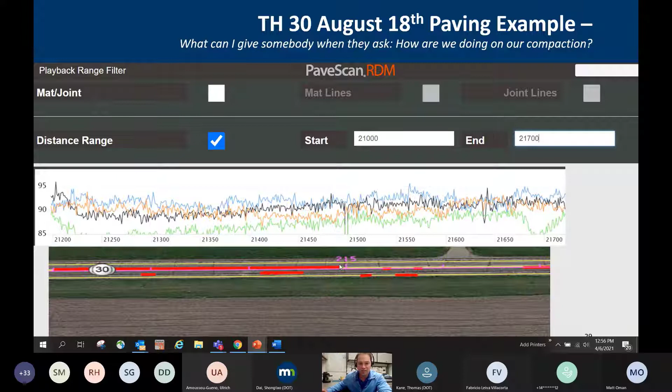So if you have these alignment files, you have a line exactly where the joint was supposed to be, as well as where the extents of both of the lanes are supposed to be, which is really nice because you can see here, this one corresponds directly to the kind of shoulder edge deficiency, and this line here corresponds directly to a center line joint.

So that kind of concludes the features that are either released in April or June as part of the software. But I also wanted to take this opportunity to talk to the group about what they'd like to see moving forward, and to generate a little bit of discussion. I'll pass it to Dai here because he's got some ideas too.

Once I'm done with this, looking at ways to do a little bit more in terms of the geospatial data - what Professor Barnes at the University of Minnesota did, as part of a MnDOT project currently separate from the pooled fund, was to take this raw geospatial data and actually create a rectangle out of it, and space it into the various one foot spacings along the lane width.

And basically take this data and make it full lane width compatible, in the sense that all the data that's within a foot of the joint is categorized together, within 2 feet, 2 to 3 feet, and so on all the way across the joint.

What's nice about this data set is you can really take this data that you can look at visually and see these sort of trends, where it's lower along the outside.

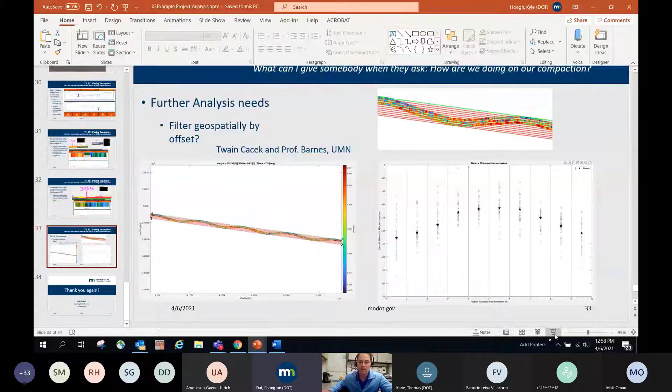Oh, you're not sharing screen. Sorry, Kyle, are you sharing screen? Oh yeah, okay, sorry, it's coming. Yeah, sorry, it's coming. Okay, yeah, okay good, thank you. Somehow didn't show mine, okay.

So you can get a real quantitative view, even with this data that's not cataloged at the exact different locations along the joint, but use the accurately mapped data to get a quantitative analysis of how the center of the lane is performing compared to the outside of the lane.

So that might be one direction that the group may be interested in - figuring out a way to get these geospatial filters implemented either into the vendor software or a third-party software that would be able to do these sort of analyses.

And with that, I'm going to pass it to Dr. Dai here to discuss some additional analysis needs.

Kyle, there's a question. Is there a recommended sampling frequency that can be set in RDM2?

The default, I believe, is set at half a foot, and I keep it at the default. One thing I'd mention is that everything you can change as a user doesn't actually affect the frequency that the data is collected. The only thing that changes the actual collection frequency is switching from walk to fast walk to vehicle mode, because that affects how often it collects. If you change your frequency within the software, it's just affecting your display. So you should be in good shape either way, but I like to keep it at the half foot analysis in terms of what I'm seeing real time.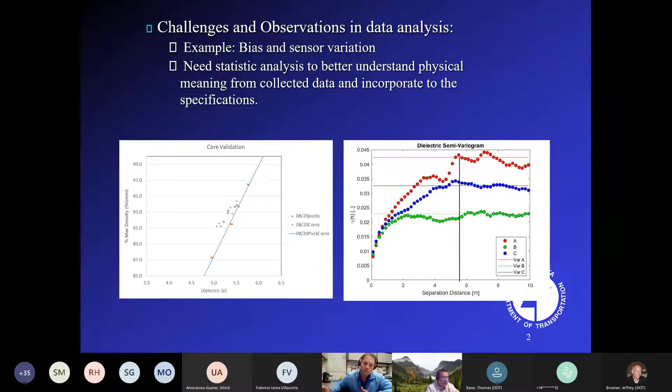So I think these features we need to look at further. We need to get more statistical analysis from these professionals to extract the physical information from our measurements, and hopefully we can incorporate it into the actual spec. Another feature he pointed out to us is distribution.

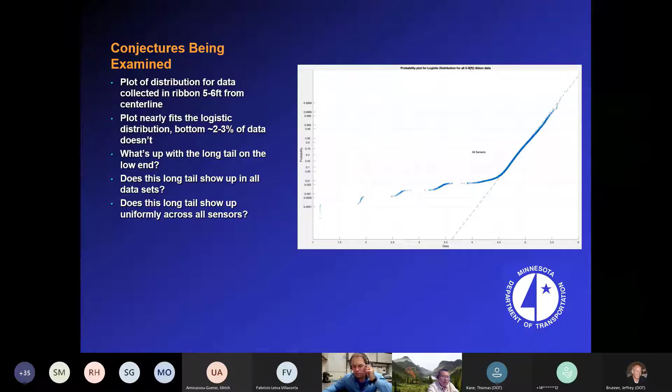That's if we put all the 3 sensors' data together. But if you look at individual ones, sensor 173 is very close to the logistic distribution, a little bit deviated, but not too much. Same thing for sensor 181, it's also close to the logistic distribution. But if you look at sensor 171, all this tail data at the low dielectric constant value comes from sensor 171. And this is something we do not understand yet.

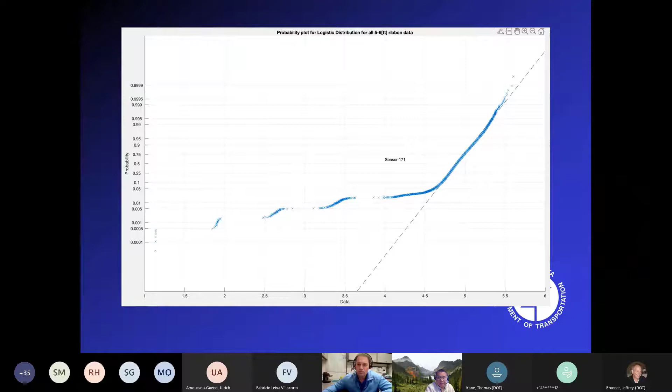I would think maybe it's due to the sensor acting like this, or maybe the sensor is close to the joint, or maybe the sensor just did not work well, and on another project maybe it works on and off. So that's something we're looking at: how do we effectively identify error data from sensors? So these are some ideas we're thinking to pursue further.

So, like Carl said, I want to hear from you. Anything you want to include in this profile? Any inputs?

So to summarize some of the additional proposed improvements, the one I presented at the end of mine was more geared towards being able to filter the data based on its geospatial characteristics. And Dai presented an idea to look at the data statistically to make sure it's of quality. That could be done on top of what we're doing with our quality assurance module, where if you throw the sensor data into the statistical model that Professor Barnes could create, it would give us an additional indication of whether or not there's an issue with our sensors. Are there any other ideas, or do we just want time to chew on those ideas?

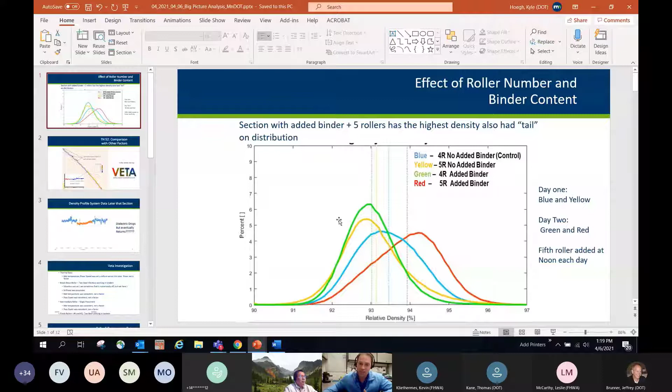Kurt gave me some slides that give an indication on how Minnesota is looking big picture with DPS and how it fits in with other technologies and quality assurance in general of the placed pavement. And this is actually data that we collected way back in 2016 that he wanted to bring back up because it speaks to the importance of being able to compare it with other technologies. So I'm going to maximize my screen here.

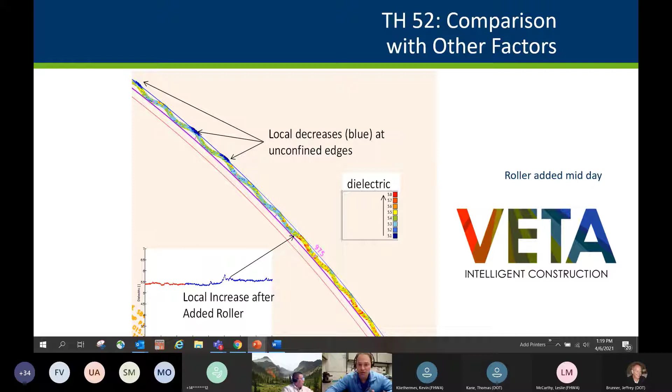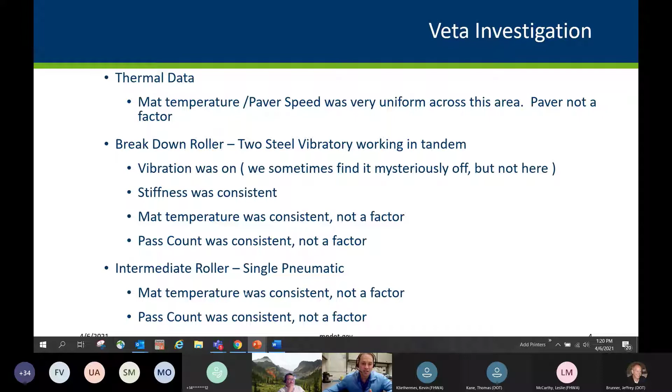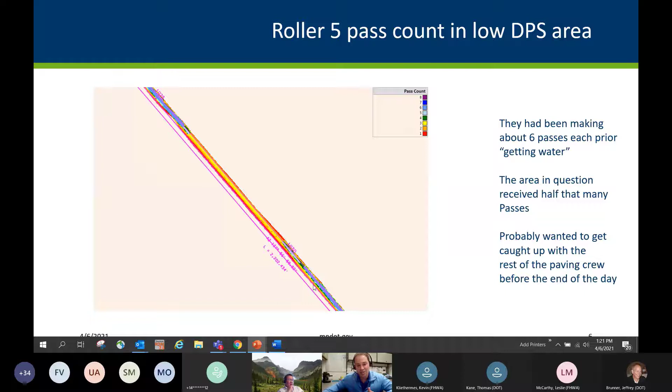So basically that just speaks to the importance of not just looking at one technology or another, but seeing how they fit together holistically when trying to really stamp out these issues and identify construction-wise how we can get our best uniformity and high compaction of our placed asphalt pavement. So again, this just shows more details about this going to get water for 15 minutes that corresponded to that drop in density that we saw with the DPS back in 2016, and then leading back up to the increase that we saw when they added the roller initially.

Kurt wanted to touch on some of the stuff we're doing with thermal because it all ties in with the placed mat. They have a pattern recognition to find poor construction based on thermal, as well as a geospatial data analysis to recognize these patterns. And my understanding is they're mostly based on geospatial uniformity, to the point where we now have incentives and disincentives based on limiting these poor practices as measured by the thermal.

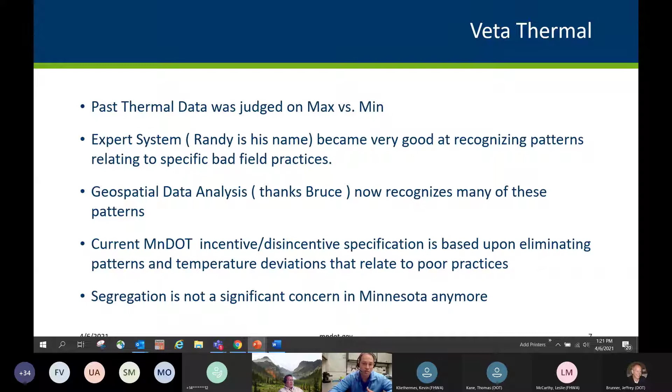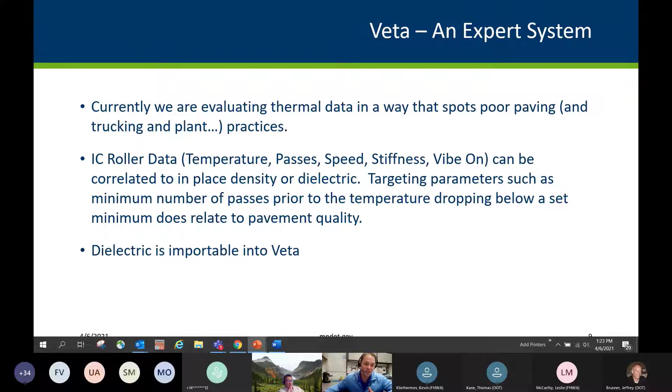And this is some of what's going on right now, which is basically thermal and intelligent compaction roller data. There's a lot of neat things within the Veta software to be able to compare and analyze data with these technologies. And now we're just starting to be able to import, coming June, dielectric data or DPS data into Veta.

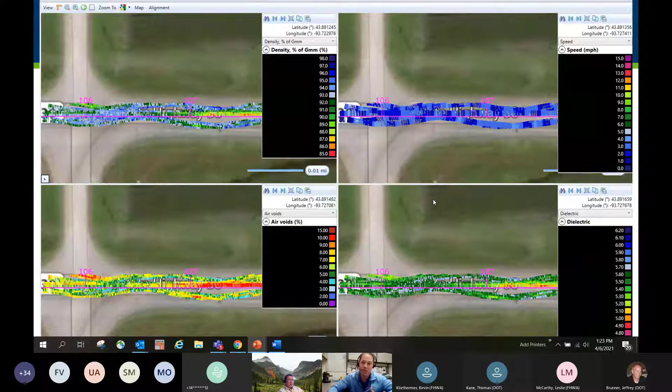So what you see here is some of the fields that the DPS data provides. Of course, you have your air voids, dielectric, and density, but then you can also provide some of these auxiliary fields like the speed of the DPS. And I could see signal quality and things of that nature being a good thing to import into something like Veta, where we have kind of a holistic view of all the different technologies.

And I think we just wanted to share it with the other states, just so you're aware of some of the power of this type of an analysis suite, and discuss some of the needs moving forward. So we're getting DPS data into Veta. The idea is to try to automate some of the more geospatial analysis that's going on with thermal currently, and do similar things with DPS. We'd like to be able to compare them to each other.

I thought that might be of interest to all the different states, to be able to say, the way I look at it, the DPS says, okay, what's my resulting density profile? And then you can look at this other ICT technology to say, okay, what actually was going on that caused that problem, and really try to use this information to eliminate those problems before they occur.